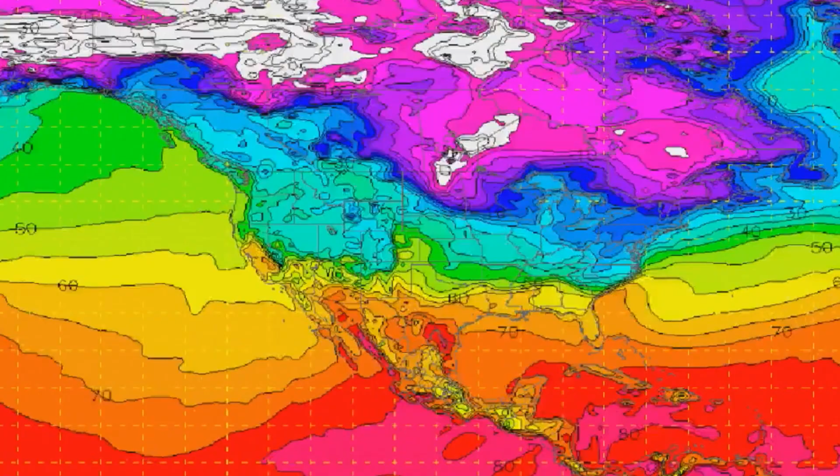In the real world, the answer to the question of can we see into the future has been answered with a resounding no. In our ever-evolving society, the trend today is to look toward the future by relying on predictive modeling to best predict the probability of an outcome. But we all know that even these well-thought-out predictions based on data often turn out to be not so predictable.

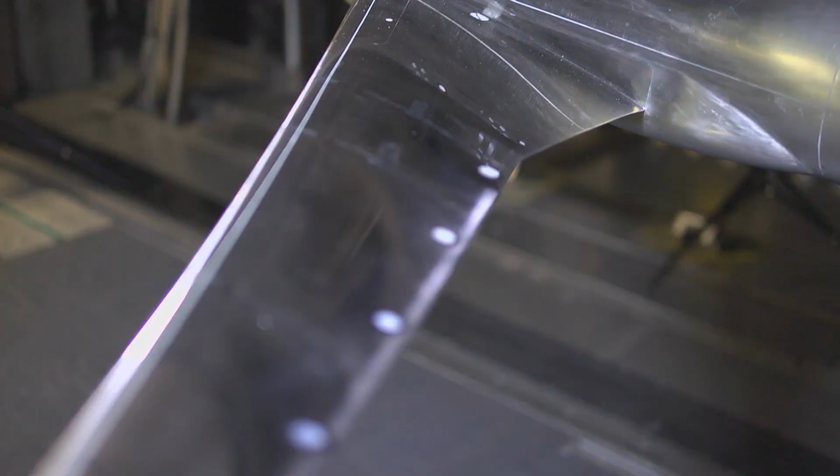Although it's clear that future events remain virtually unknowable, there is one group within NASA that comes as close as you can to seeing into the future. Throughout NASA's field centers, members of the Fixed Wing project team are peering into the future every day and coming up with concepts that they believe will be on the next generation of aircraft. Because it takes years to plan and develop these concepts, the hardware and theories that are being tested today will be key components that enable the next generation of aircraft to take flight.

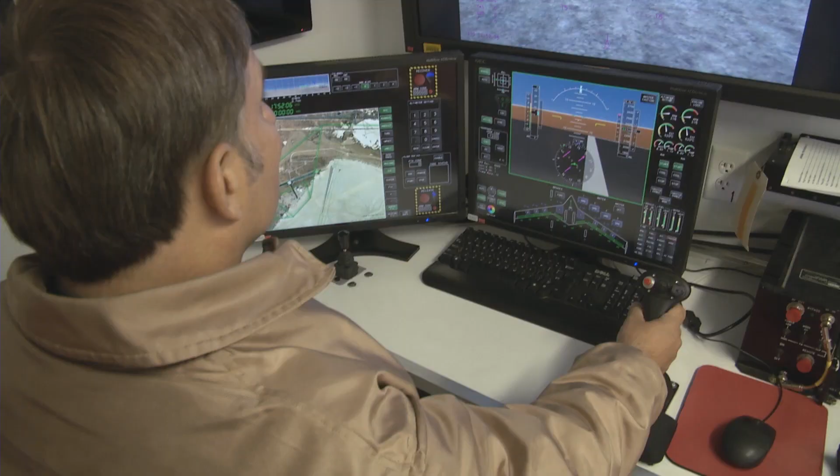On this episode of NASA X, follow us around the country as we visit members of the Fundamental Aeronautics Program's Fixed Wing Project, who are developing the framework that will shape how aircraft of the future will fly. Take a look behind the gates of NASA to see what some of these new ideas look like and how the engineers of NASA are paving the way for the ideas that will change the future of flight.

To the untrained eye, most of the aircraft of today look very similar. This is because over the past century of flight, aeronautical engineers have worked hard to optimize passenger aircraft to the point where they are as efficient and safe as possible. As a result, the basic tube and wing shape has been configured and examined from every possible angle, making it the most efficient design possible today.

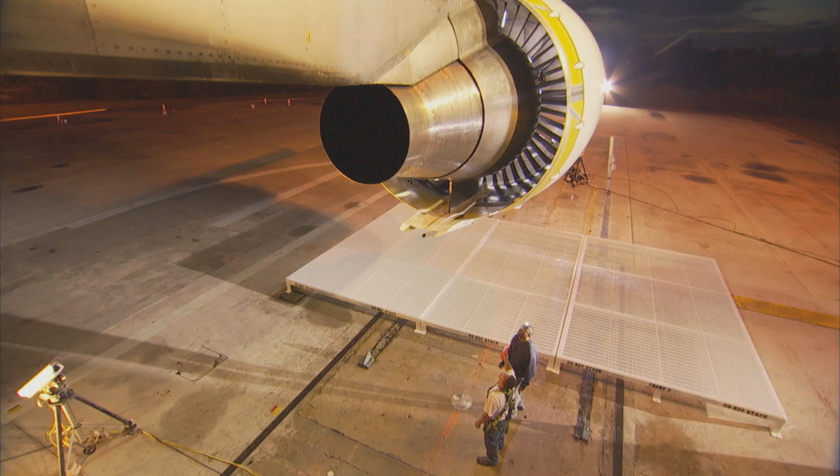Although aircraft have looked basically the same over the past few decades, if you look closely, you can see some of the major design changes. Wings that were once swept back more dramatically now are less so because of advances in aerodynamic shaping. Engines that spewed emissions by the ton are now much more efficient. Materials that were once so heavy that they significantly weighed down a craft are now much lighter and stronger.

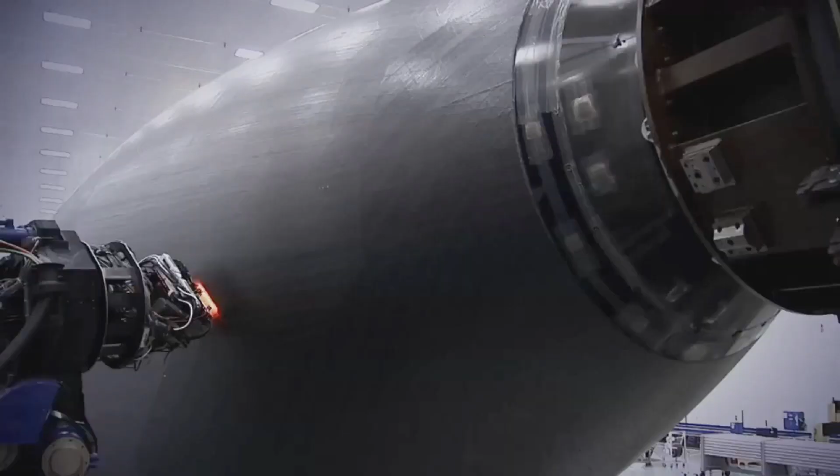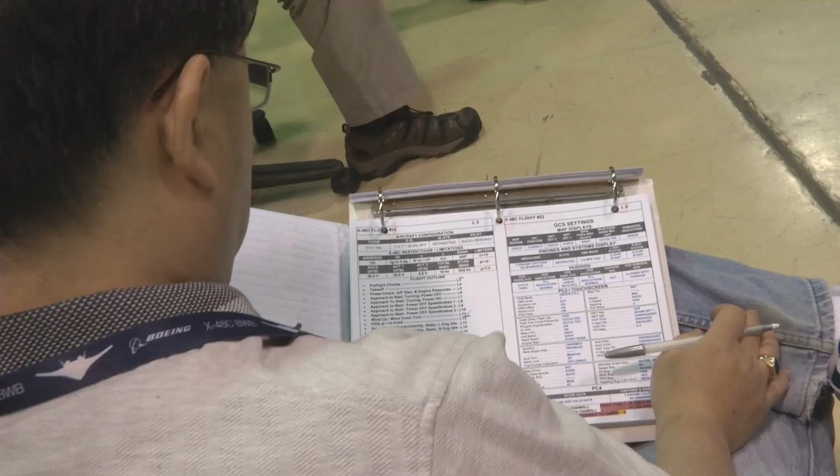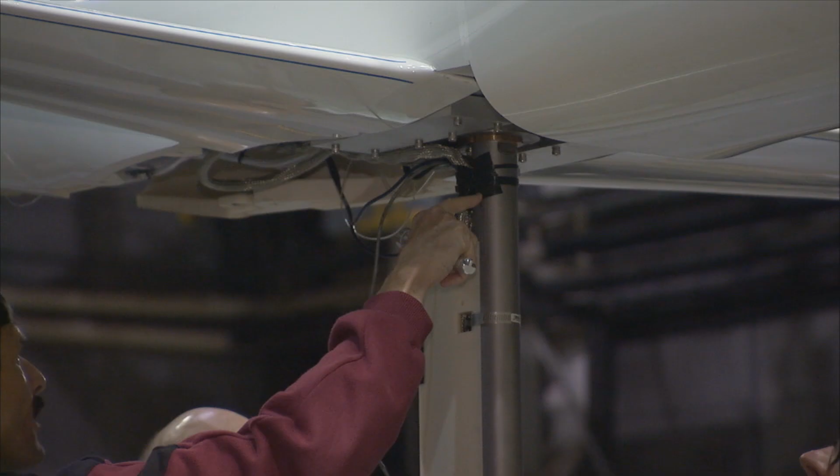With all this improvement and efficiency, it is fair to ask if there is anything else that can be done to make flight even better. The answer is of course yes. Behind the gates of NASA, there are scores of researchers who know that we can still make aircraft better because they are working toward these long-term goals every day. Some of these researchers from the Fixed Wing Project are working on so-called N+3 configurations and goals.

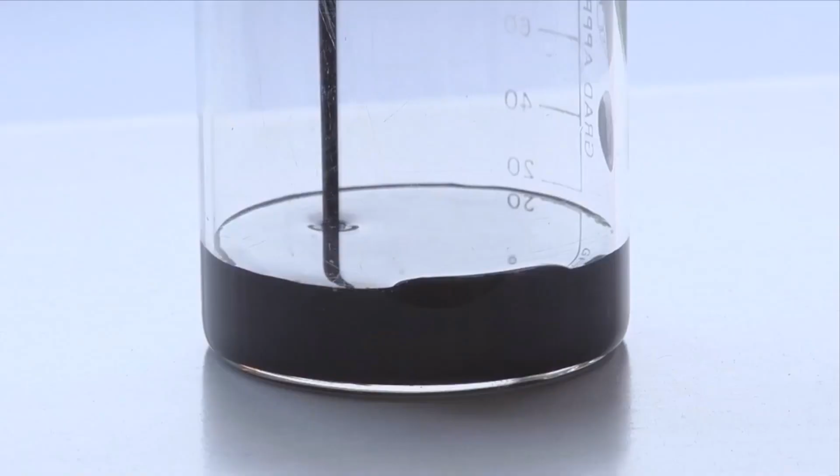In mathematical terms, the letter N is where you start now. N+1 is the next step. N+2 is just beyond that, and so on. Here in the Fixed Wing Project, N+3 equates to aircraft that will be flying in around the 2030-2035 timeframe. For this team, everything is on the table, including engines, fuels, wings, and fuselage shapes.

Well, we need to remember the first A in NASA is aeronautics. So it's a National Aeronautics and Space Administration. Aeronautics is the field of research for airplanes. The airplanes that fly today were researched and experimented with within NASA many years ago. So we're trying to continue that tradition, that important work that we have done for the nation and the world, for 20, 30 years from now.

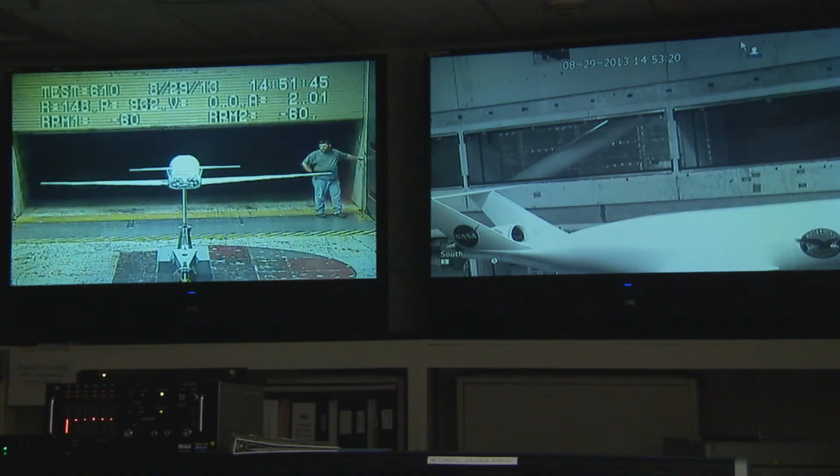Fixed Wing is a NASA research program where we are doing activities to try to improve the airplanes that we're going to be flying in the future. We're trying to make them less noisy. We're trying to make them better for the environment. We're trying to make them in a fashion that they will use less fuel.

The research we're doing is important because air travel is such an important part of your life. People travel, and even if you don't travel, cargo gets carried every single day. You use something every single day that gets carried by an aircraft. It's part of our way of life these days, and it often gets taken for granted. There are challenges though, so we are focused on exploring and developing technologies and concepts to improve the energy efficiency and environmental compatibility of transport aircraft.

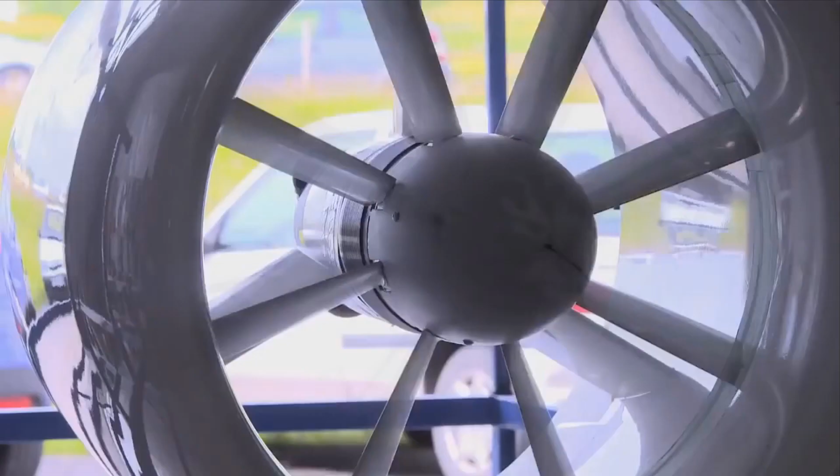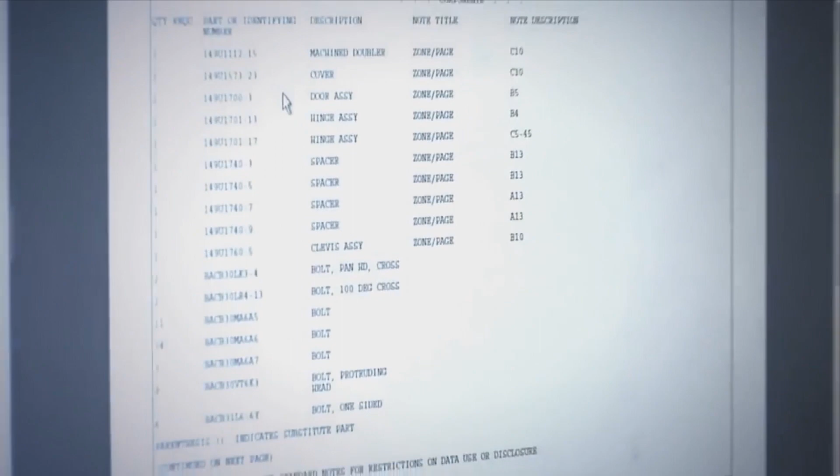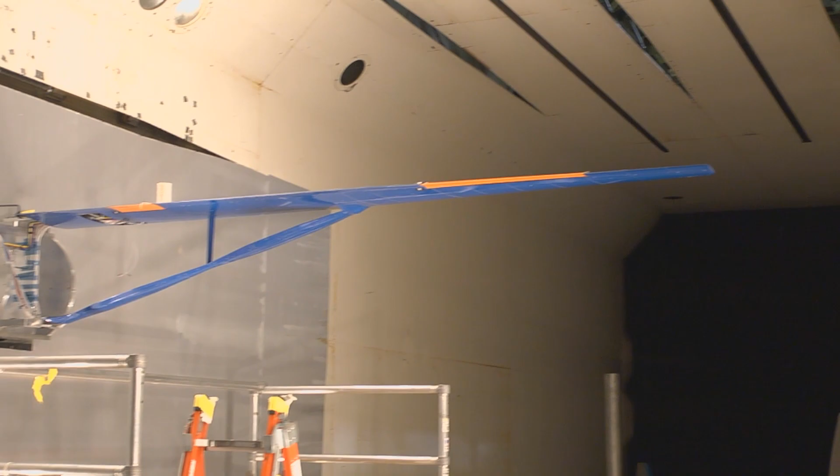With this mandate to significantly lower noise and emissions and increase performance for subsonic aircraft, there will be a need to address virtually every aspect of the current aircraft configuration, including developing new materials and engines, testing alternative fuels, and even changing the fundamental shape of the aircraft. All across the country, fixed-wing researchers are doing just that. Major advancements are being made into the understanding of how future aircraft will fly. Because there are so many areas of study, let's first look at something that has the potential to be used today as well as in the 2030 timeframe: alternative fuels.

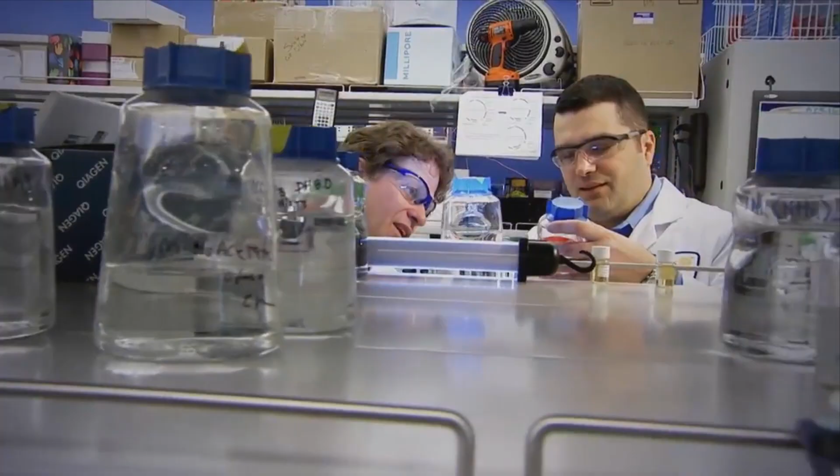On this beautiful morning at NASA Dryden in California's high desert, a test called ACCESS, or the Alternative Fuel Effects on Contrails and Cruise Emissions test, was performed to study the effects of alternate biofuel on engine performance, emissions, and aircraft-generated contrails at altitude. For this test, 2 aircraft were flown in tandem. The first is NASA's DC-8, which will be burning an alternative fuel.

The second aircraft is NASA's Falcon that will fly directly behind the DC-8 to measure and characterize the emissions coming out of the engines from the alternative fuel. Here is NASA's Bruce Anderson to explain. NASA's role is in assessing the combustion characteristics of alternative fuels, as well as determining how these fuels will affect the performance and emissions from aircraft.

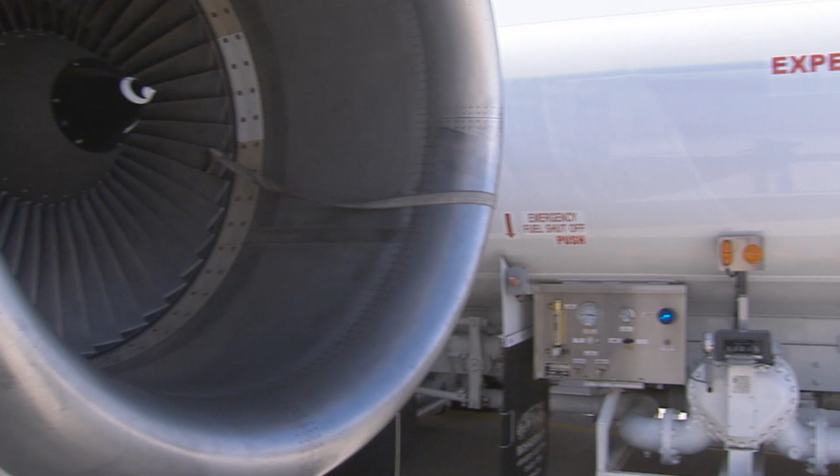To understand how aircraft affect the climate, we need to make measurements at cruise altitudes. So the focus of ACCESS, or the alternative fuel effects on contrails and cruise emissions, was to fly behind the DC-8 in flight and look at its emission and contrail characteristics as we changed from standard jet fuel to a fuel that was a blend of a fuel made from camelina plant oil and also added 50% of Jet A to that.

There are some other groups out there. Tyson Foods is making a biodiesel and biojet fuel from chicken fat that they sweep up on the processing plant floors. So there's a number of different ways of making these alternative fuels. All of them result in a fairly clean kerosene that doesn't have nearly the contaminants in it that the fuels from refineries do. The fundamental thing is the aircraft has to retain its performance characteristics when you burn a fuel. You can't have any drop in power.

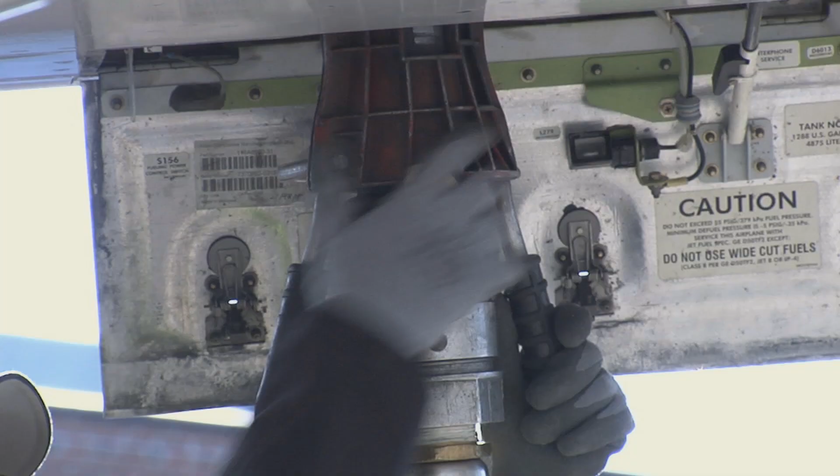The fuel also has to have similar characteristics in terms of density and volume to kerosene. So what we're looking at is drop-in fuels. A lot of the fuel systems on the aircraft are designed to rely on the aromatics in the fossil fuels to swell the seals to make them leak tight. So when we fly an alternative fuel, we have to mix it with standard fuel to retain those properties. Otherwise, the fuel would just leak out of the aircraft.

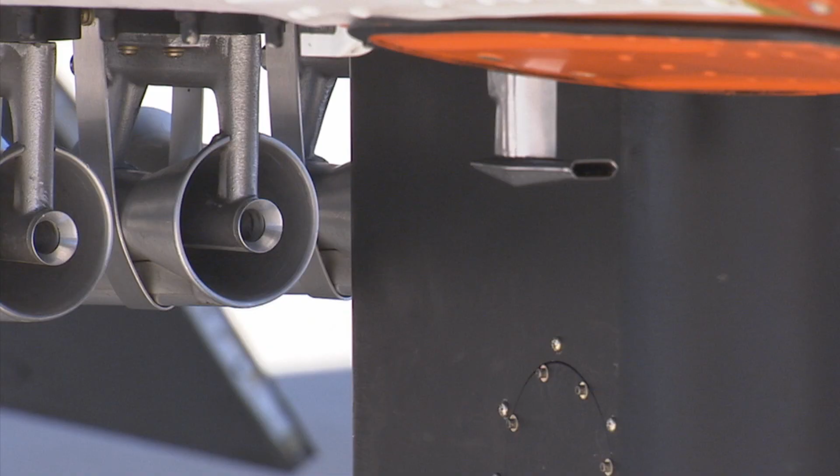And then the second thing we're looking at is just the emission characteristics. By that I mean the amount of pollutant generated per kilogram of fuel burn. After the first few flights, it was shown that using these types of alternative fuels could significantly reduce emissions at cruise altitudes, particularly soot emissions. Work continues to better understand how to use these fuels and how to make them even more efficient for future aircraft.

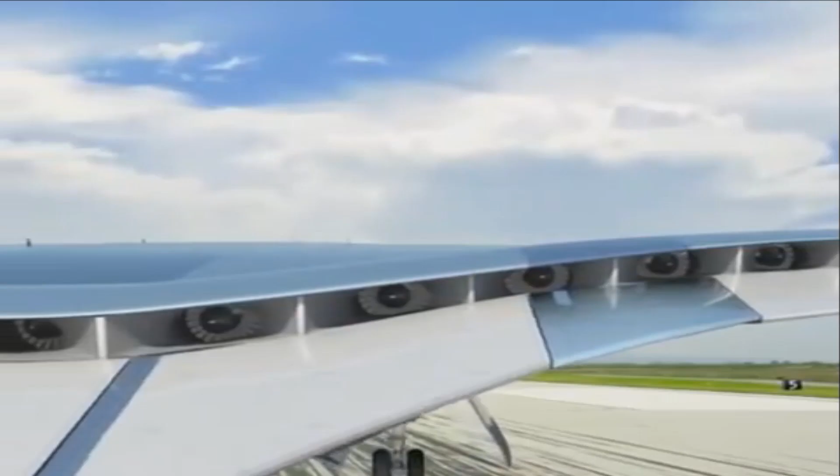Other than alternative fuels, there are some other ideas out there for finding more efficient ways to power aircraft. If we look on our roads today, many of the cars that are now being driven run on a combination of fuel and electricity. The idea that aircraft could do this seemed far-fetched only a few short years ago, but today, this idea is gaining traction. There are several ideas on how to do this, so let's take a look at a few.

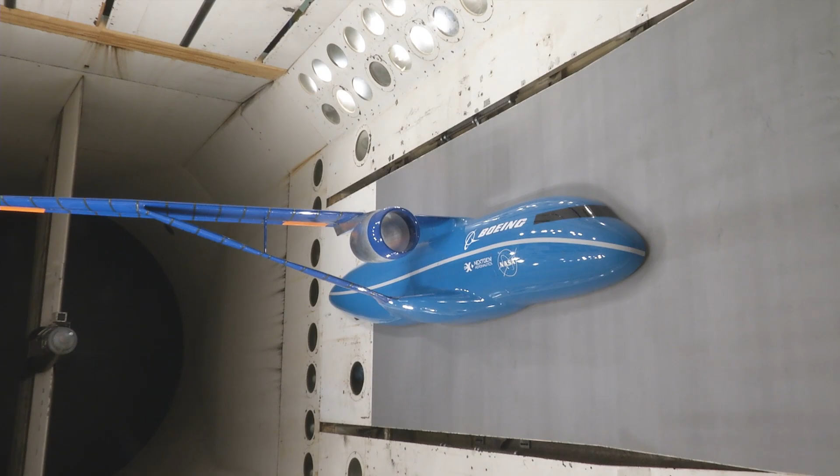Here, a team is looking over a new Boeing aircraft design called SugarVolt. This unique design has several interesting changes, like the truss-braced wings that have the potential to reduce the drag of the wings by making them longer and thinner. Because thin, long wings have the tendency to flex more, designers have included a clever, efficient truss structure to support them. This design has the potential to reduce drag and weight, thereby making the craft more efficient to operate.

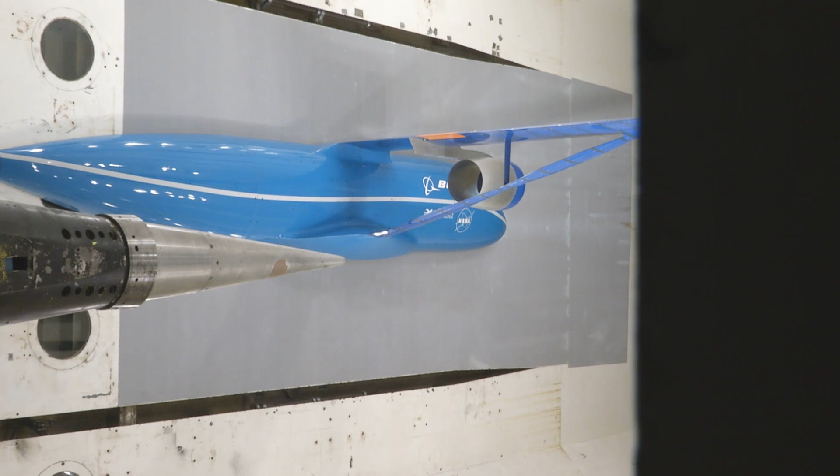At first glance, those unique structural changes may look like the biggest game changer for this type of aircraft, but the Sugar concept holds another surprise as well. In the case of the Sugar concept, what's less obvious to the eye when you see it is that it has an unconventional propulsion system. It's a hybrid gas-electric concept that's closer to what you see in a Prius. It has batteries and a gas turbine engine technology.

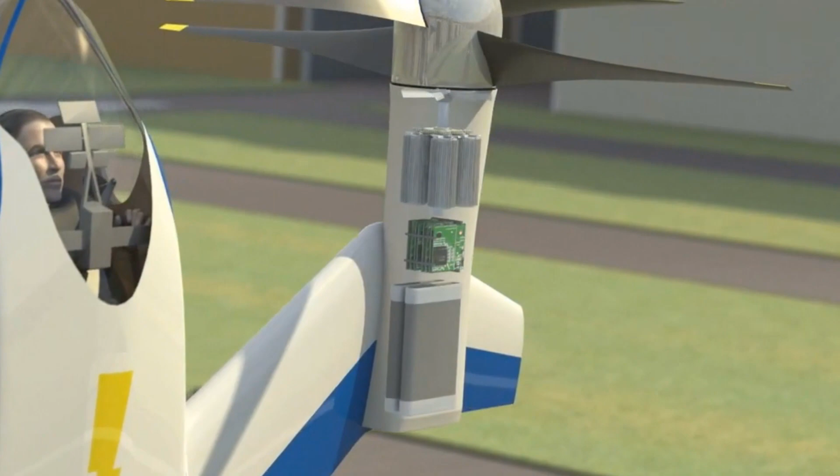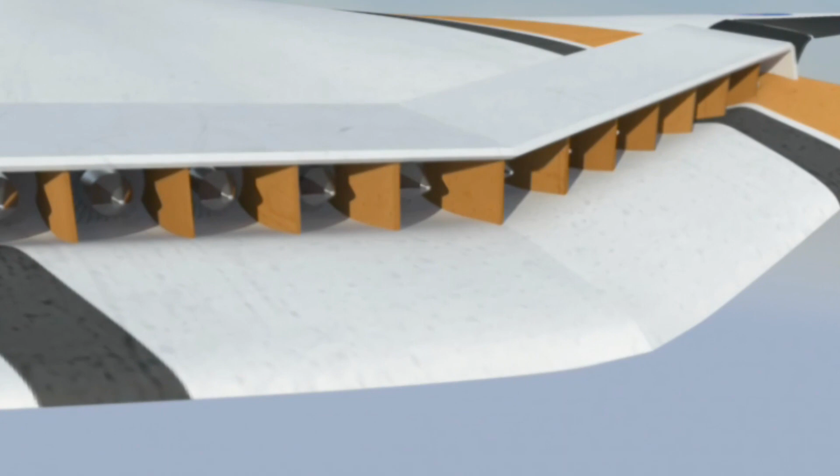It requires advances to battery technology, but those are happening throughout the world independent of the aerospace industry, and we're trying to leverage that. We do it on cars, we should be able to do it on airplanes eventually. The challenge is to take those batteries and have enough energy or power content and have them be lightweight. Where we are today, I think, is we're at the dawn of the age where we could start to see electric propulsion or hybrid electric propulsion.

And you'll see it on smaller aircraft first before you see it on the large commercial transports. But that's what we're working towards. That's good for cleanliness, it's good for noise, it's good for energy efficiency. It has its challenges. That's why we're working on it, and that's why it's not being done today.

The idea behind this vehicle is to have its twin engines burn fuel when great power is needed, like at takeoff. But when the craft is in a cruise configuration, a switch can be made over to a battery electric mode to supplement or even replace power to the engines. If successful, this could reduce the amount of fuel burn by up to 70%.

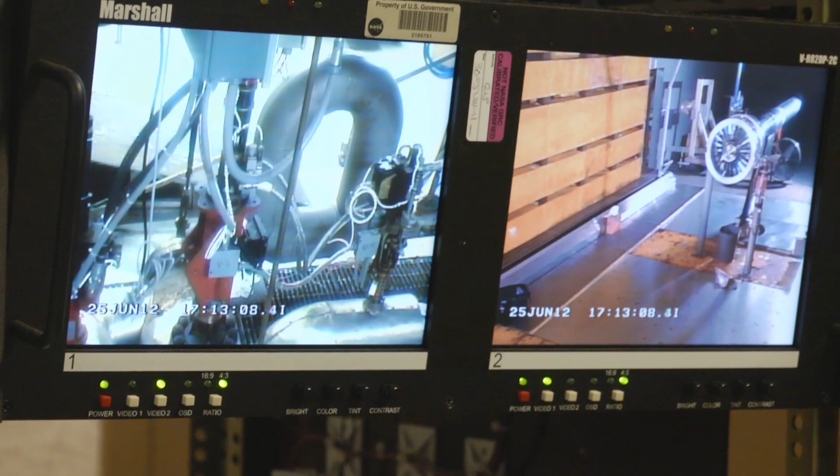Another concept called turbo-electric propulsion is being studied here at the NASA Glenn Research Center. Here is NASA's Jerry Brown to explain. There's not been electric airplanes except in very small size. And the reason is that electric motors and generators tend to be too heavy for flight. We're hoping to change that, and we're hoping to get a benefit from saving a whole lot of fuel in the process. The type of electric propulsion that we're talking about today is turbo-electric propulsion.

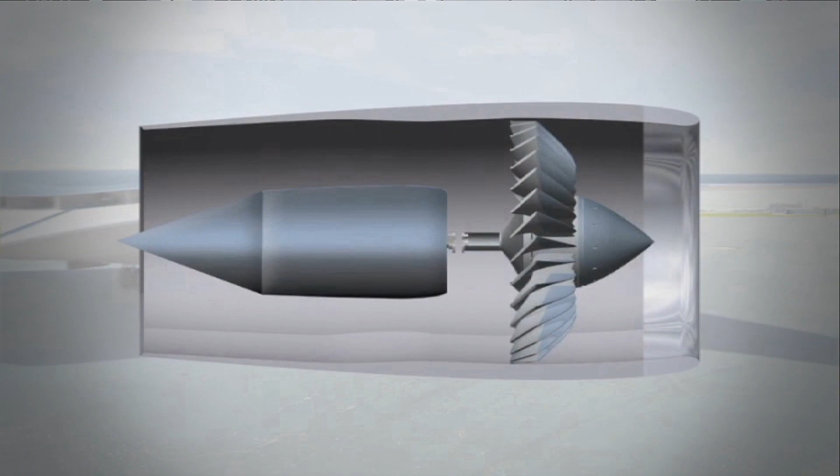We're going to keep the turbine engine because it's really good as far as a lot of power in a small power plant. And then we're going to use its power to drive a generator, send electricity to motors that drive fans that do the propulsion. This concept will look very different from vehicles of today as well. Potential designs include 2 large turbine engines on the wingtips that will drive 2 large generators inside the body. The generators will in turn power a number of fans, providing the propulsion the aircraft needs to fly.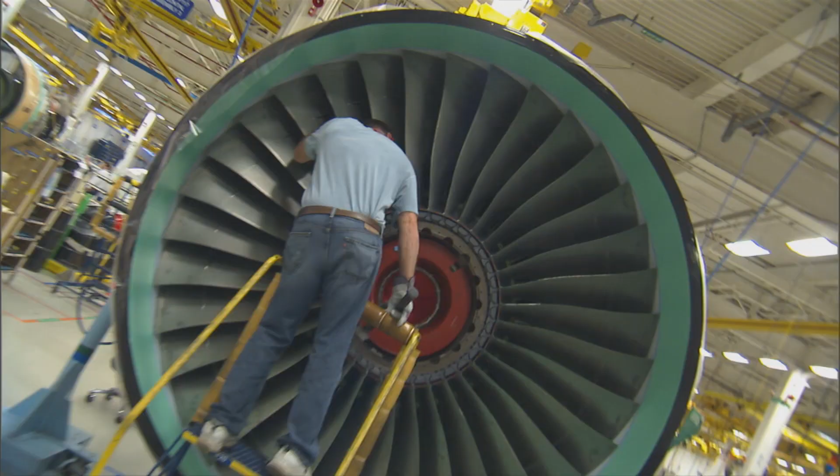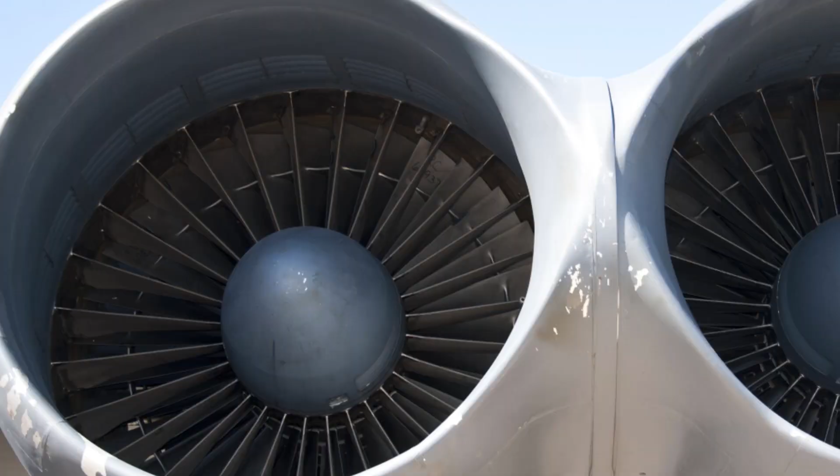What we want to do here is we want to be able to break the turbine engine from the fan, and that gives the aircraft designer a lot of freedom. If he can move the turbine engine somewhere else in the airplane, that may itself have advantages. The engine and the fans don't have to turn at the same speed. You don't even have to have the same number of fans. And that's what we're really looking for, is we want to have an array of a whole bunch of fans, maybe 15 of them, say, and just 2 engines. You like to keep just 2 big engines because the big engine is much more efficient.

This idea is intriguing, but big changes need to be made to make it viable. One major challenge is the need to reduce the size of the generators, because the generators of today are way too big to fit on an aircraft. One idea that the NASA team is looking at is a way to remove the current type of copper windings in the generator and replace it with superconducting material. This change would allow the generators to shrink, making them viable to fit on future aircraft.

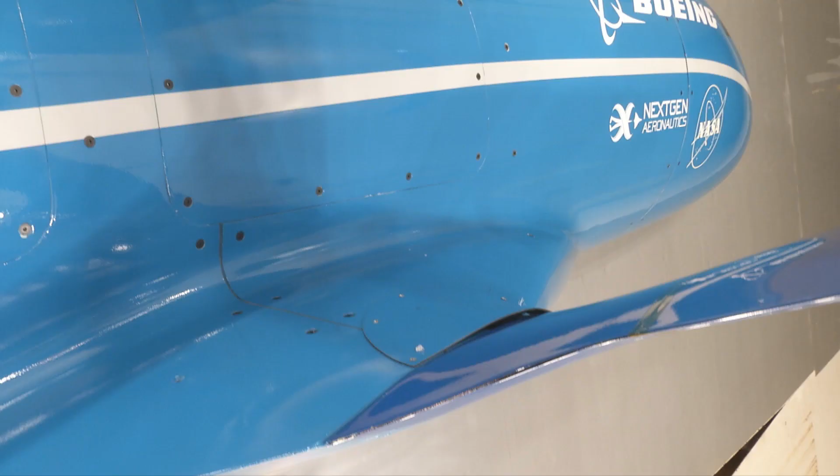As we've seen so far, new aircraft designs are coming online that have the potential to greatly improve aircraft efficiency. Another of these revolutionary designs has come out of a joint MIT and NASA study. This unique design is called the double bubble and has the potential to reduce fuel burn by up to 70% as well. So the MIT D8 double bubble design was something we've been working with MIT on for a number of years. The idea there is to take some of the lift that you would normally get from the wings and try and move that to the fuselage.

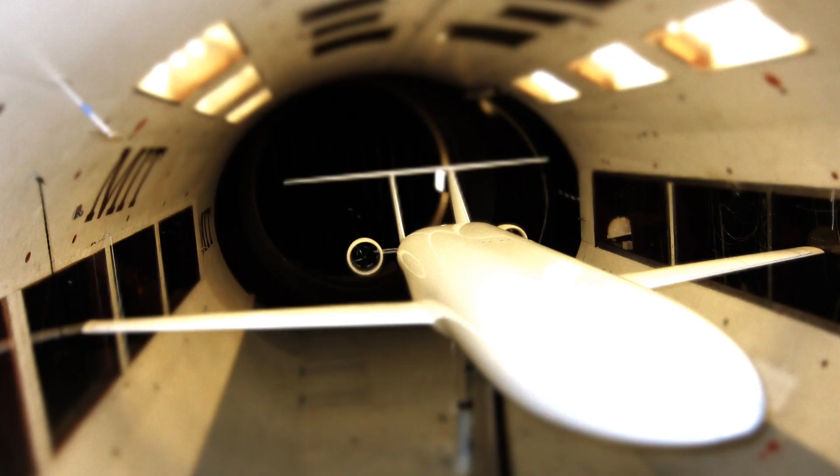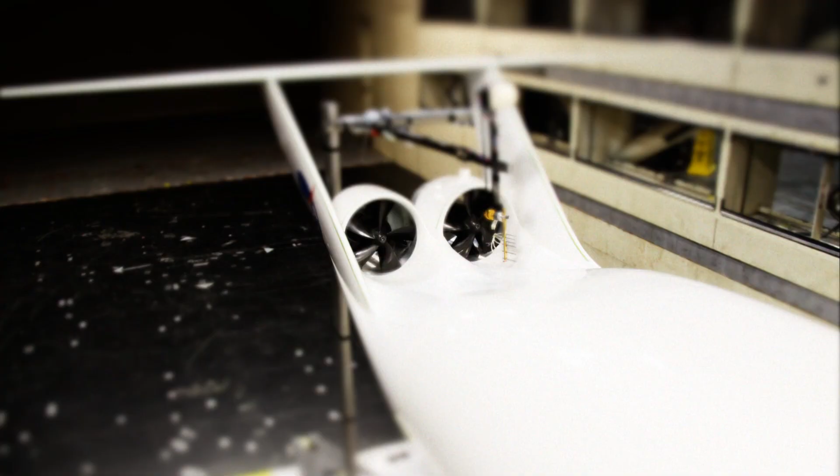It has 200,000 processors working on the problem if you use the whole machine on one problem. So it's a very large machine, and we need that very large machine because we need to do very big problems here at NASA. The aeronautics research that we're using it for is to try and simulate the flow over these N+3 configurations.

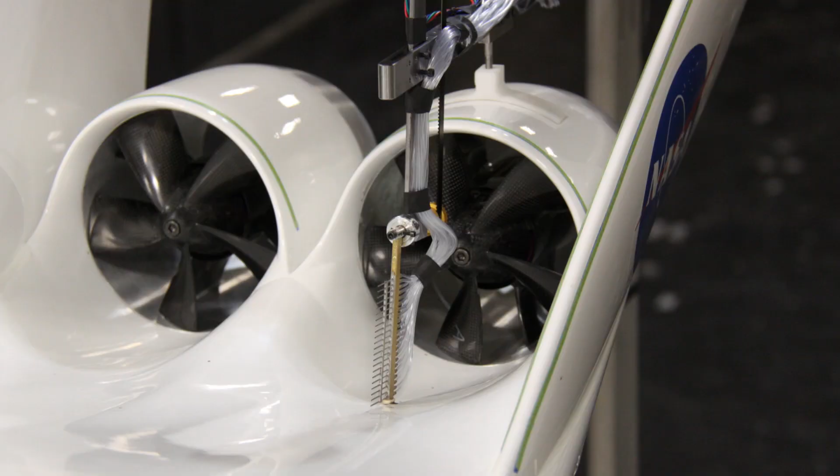So in order to capture all the detail you'd see on a vehicle like this, including what's going on inside the combustors of the engines and things like that, you need to have a lot of grid points to resolve all the fluid motion inside those engines, over the airplane, and having that many grid points to resolve all that physics in 3 dimensions creates very large computational grids that require very big machines to advance the equations that govern the fluid motion and get these CFD, computational fluid dynamics solutions that we use to make our assessments.

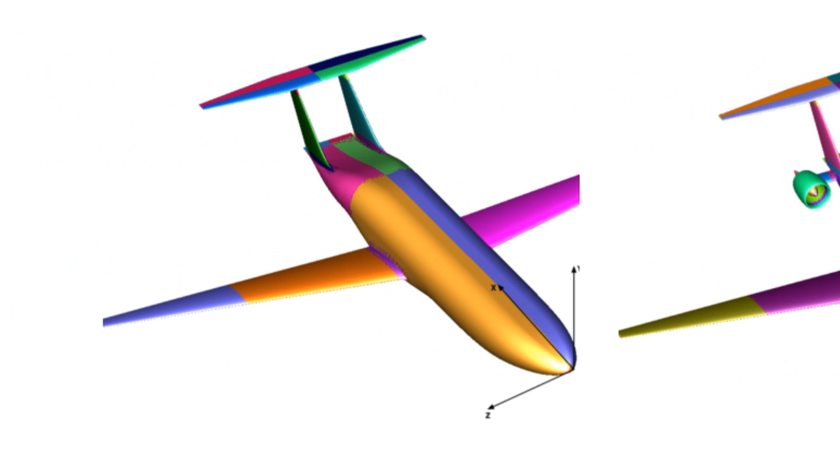Aerodynamicists of today are able to model ideas on computers, which allows them to test many different configurations before a wind tunnel model is ever built. Once a design is agreed upon, a wind tunnel model can then be fabricated and tested. This process was used for the double bubble as well, but the wind tunnel test showed surprising results.

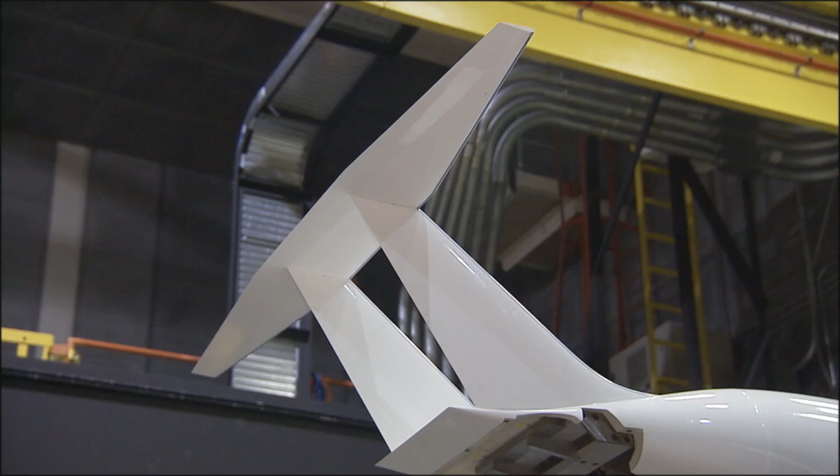The good news is that we've just completed the first test of this configuration in the Langley 14x22 wind tunnel at NASA Langley, and it showed even a greater reduction or a more fuel efficiency benefit to this technology than we had predicted on paper with our low-order models. So we're trying to digest the experimental data that show this nice benefit in fuel efficiency from this configuration.

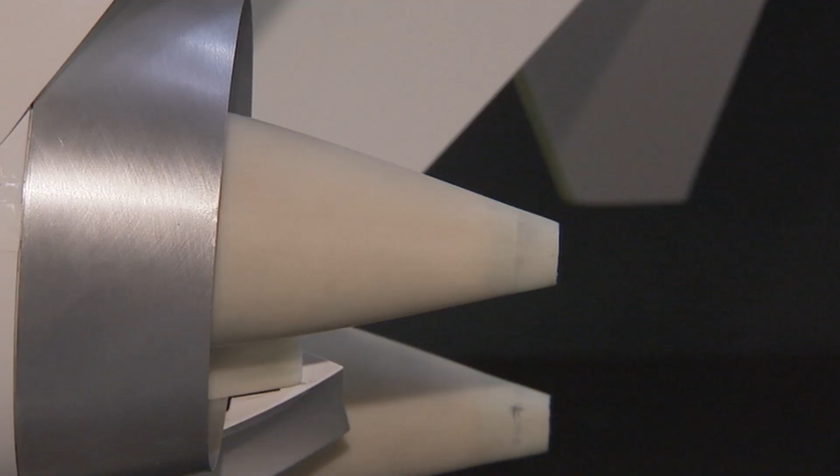At the same time, we're also using the supercomputer here at NASA Ames, the Pleiades supercomputer, to do computational fluid dynamics CFD runs of these same configurations and see if we can confirm that benefit on the computational side as well. Testing will continue on the double bubble, and if the results hold, you may see this type of aircraft at an airport near you in the future.

When testing aircraft, many different stages occur. We have already mentioned CFD and wind tunnel testing, but another tool in testing future designs is to build a flying scale model. Although CFD and wind tunnel modeling is the mainstay, often test flights of these small, scaled-down versions of an aircraft offer some of the most dramatic results for researchers. That is the case with this aircraft, called the X-56.

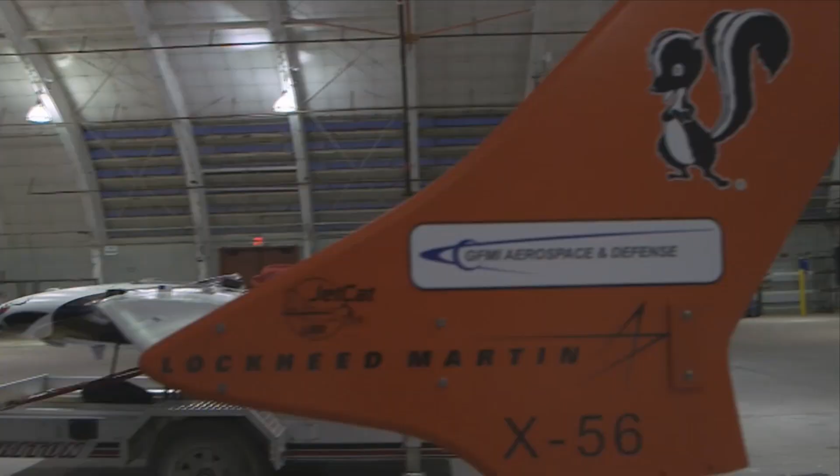This aircraft is being used as a test bed to understand how different wing configurations work and how a unique idea called active control may be used in the future. The whole concept behind the X-56 is that they've long known that a very long wingspan vehicle is more efficient than short wingspan vehicles. Problem is though, when you get a very long wingspan, you start to get into issues with flutter modes that start to creep into the vehicle, so the wing will go unstable and in extreme cases will rip off the vehicle. To get around that problem, you can use active flight controls to suppress those flutter modes.

Active control is you put things like accelerometers within the wing, and as soon as you sense that the wing is starting to get into these flutter modes, you use the control surfaces behind the wing to damp that out. So the airplane, as it's flying, is continually fighting these modes and keeping the wing straight and stiff. Then you can build a lighter, longer wingspan vehicle that is more efficient.

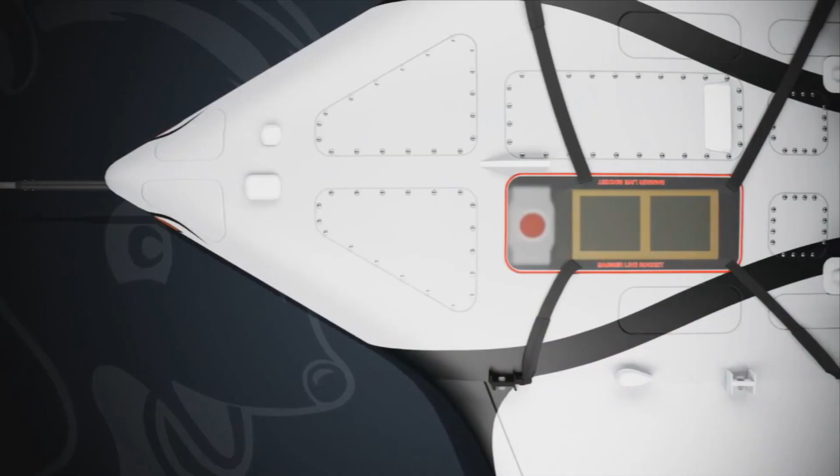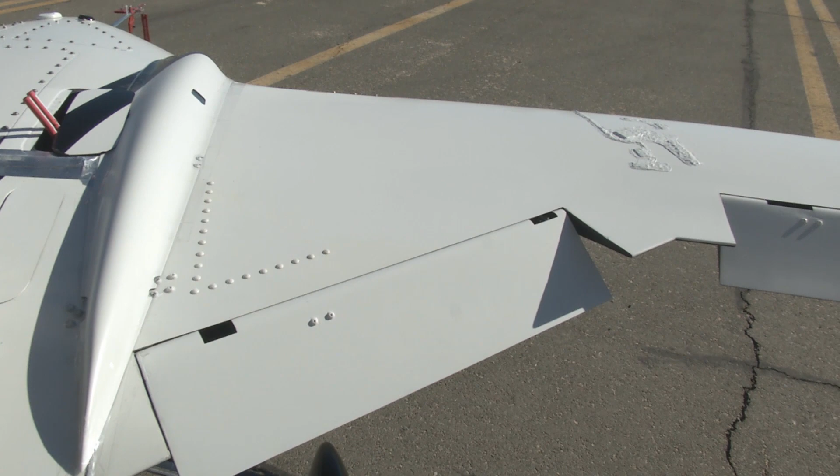This vehicle, as funded by the Air Force, was built as a multi-utility technology test bed. They call it the MUTT for short, and it is built to do a lot of different kinds of testing in aeronautics. The wings are removable. You can put on a stiff wing, you can put on a flex wing, you could do a joined wing configuration. We can learn quite a bit from testing this kind of vehicle. Right now, the focus is on flexible wing and active control of flexible wings, but in the future, there are many experiments that can be done with this vehicle.

The research on the control of lightweight, flexible wings being performed today on the X-56 is key to enabling the long, thin, low-drag, and low-weight wings of tomorrow's N+3 configurations. Much is going into understanding what it will take to improve the already incredibly efficient aircraft of today into ultra-efficient vehicles of the future. Although we don't have all the answers yet, it's clear that NASA and its brilliant engineers and researchers are helping to lead the way to a safer and more efficient way to travel.

We are nowhere near the maximum that we can get out of this industry. And there is a lot of work to do, and that's what my team is doing. That's what we're doing within NASA, and I cannot wait for the future.